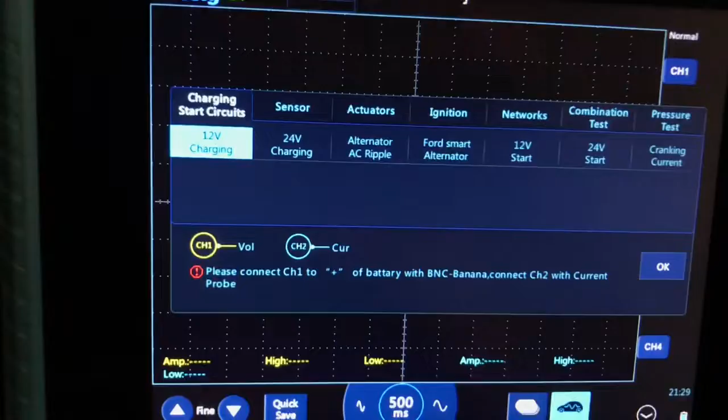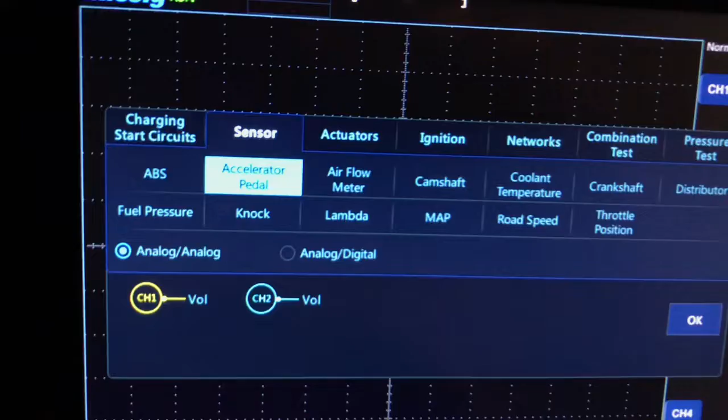Alright, we're going to go down here. If you have the ATO1104 with automotive presets, you're going to go down here and press automotive presets. Then we're going to go to sensors, we're going to go to accelerator pedal. Man, it's just not wanting to. Okay, we're going to go to accelerator pedal.

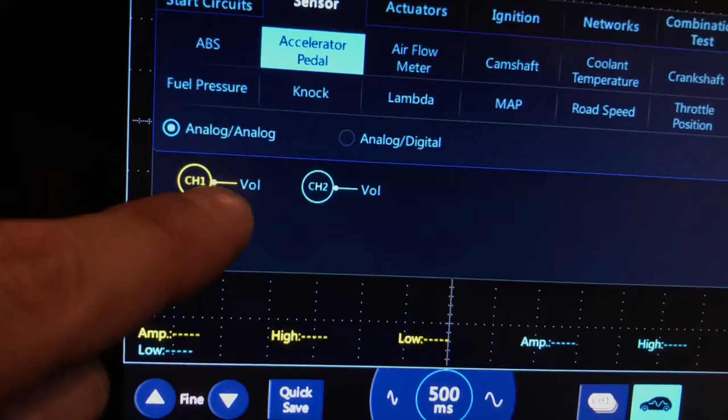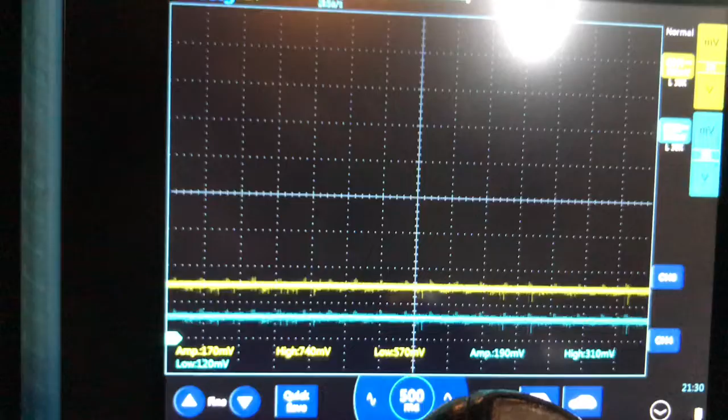And as you can see down here, it tells us channel 1 voltage and channel 2 voltage. So we're going to hit OK. And it's going to bring up our traces. Channel 1, sensor 1 is the yellow trace. Channel 2, sensor 2 is the blue trace.

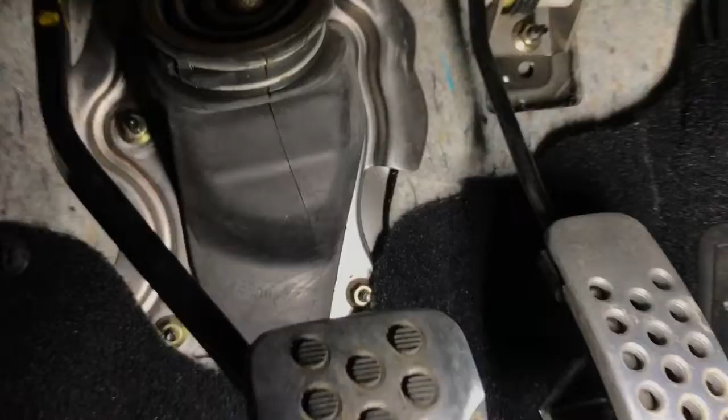Oh, let me take you underneath here. Sorry about bouncing around, let me show you where we're connected the best I can. Alright, here's our pedals, clutch, brake, and gas to the right. I'm just going to follow up your gas pedal. I'm trying to do this like upside down where you can see.

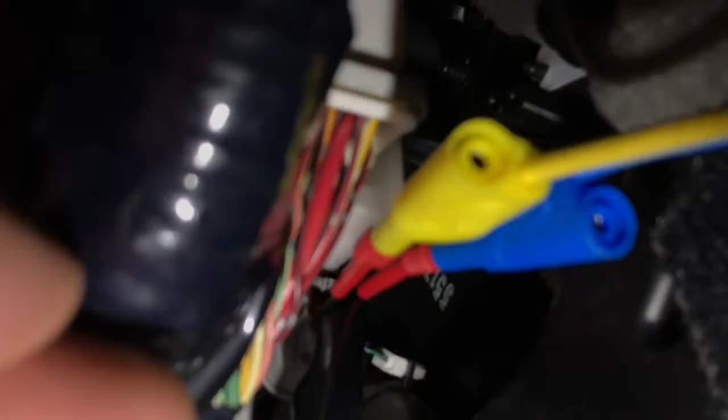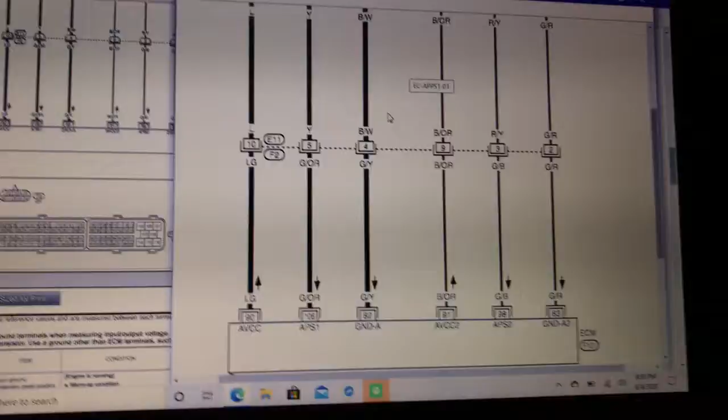Here we go. You can see right here is... man, it's really not good, I'm gonna take my word for it. The harness is right there. Okay, and channel 1, let me show you over here. I'm gonna need to edit this, huh? Why does that look like that? Looks all shaky and stuff.

So here we go, accelerator pedal position, sensor 1 and sensor 2, they're actually in the same harness. So don't get confused looking for a second harness that's not there.

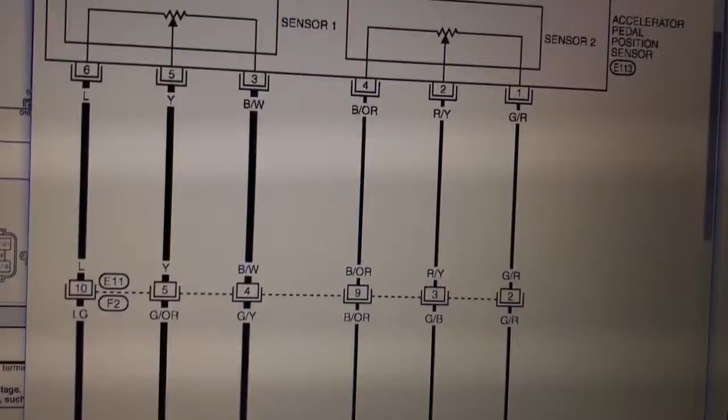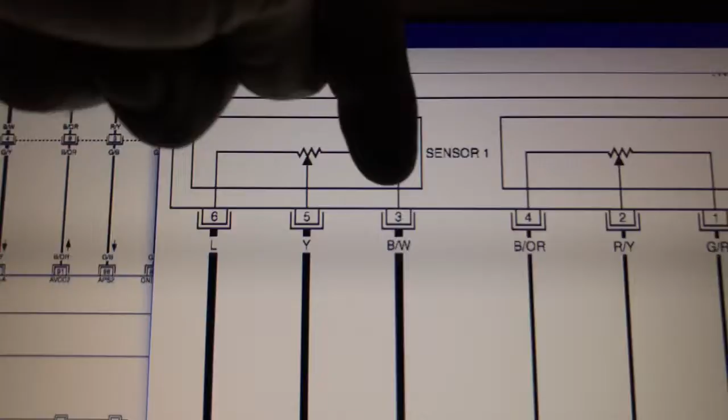So we're connected. We want to be on APS1 and APS2. If you follow that up, we want to be on the red and yellow wire, and for sensor 2 and for sensor 1 we want to be on the yellow wire. Okay, so that's our voltage end.

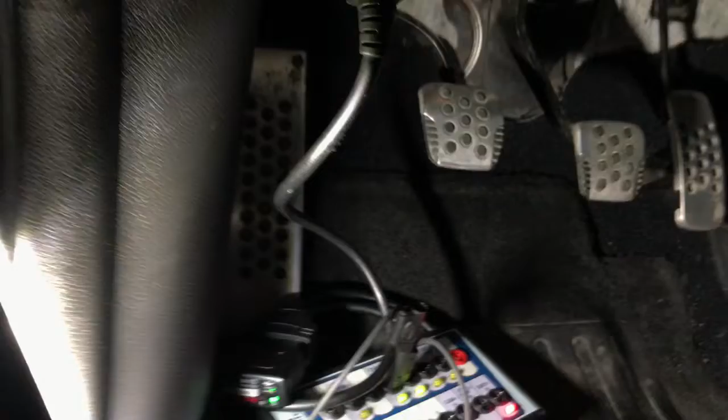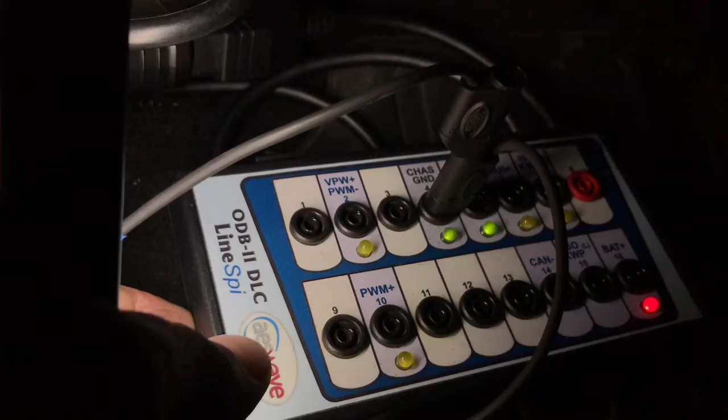For our ground, since I prefer using the battery ground, and AllData will tell you do not use the ECM ground while doing this, since I couldn't reach all the way to the battery ground and I didn't want to bring out my Power Probe 4 to give me a ground, which you can do, I'm using a Bob breakout box. This one here is an AES Wave, this is the AES Wave LineSpi.

Notice channel 4 says chassis ground, and then channel 5 is signal ground. So I'm just piggybacked, as you can see, on channel 4. You can see the green light is lit up. If you're not familiar with this, you can see green lights lit up for both of the grounds right here.

Man, it's a terrible recording, I apologize guys in advance. Two grounds, and then right here on pin 16 is your battery. Yes, this red plug or banana plug should be right there, and the black one should be up there, but in my world everything seems to be upside down.

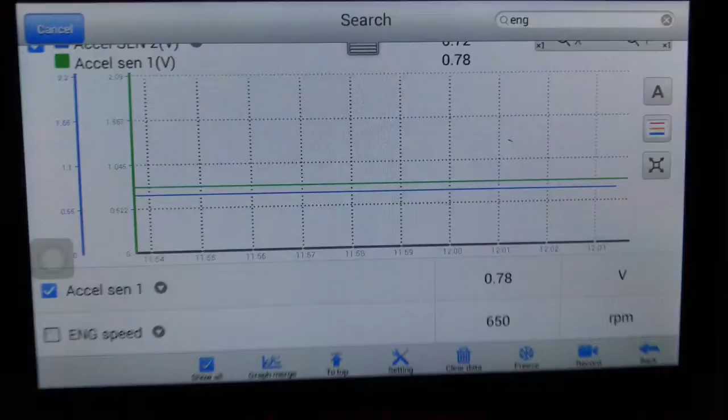So there we go. Also plugged in to the bob is my Autel. I got it plugged in. So we have our grounds here, we have our power leads there, we have our scope right here, we have our Autel, and let's see if I can get that.

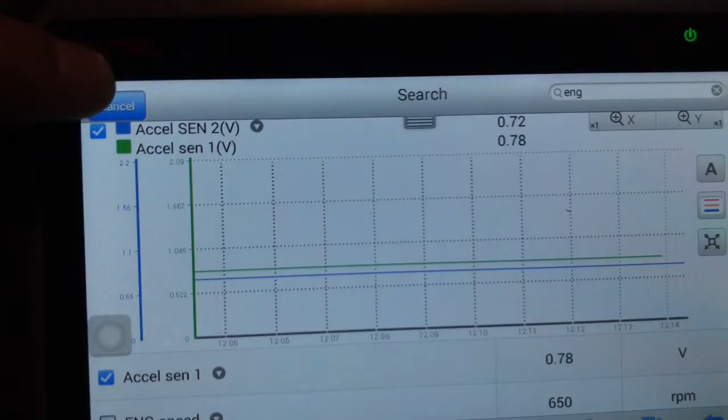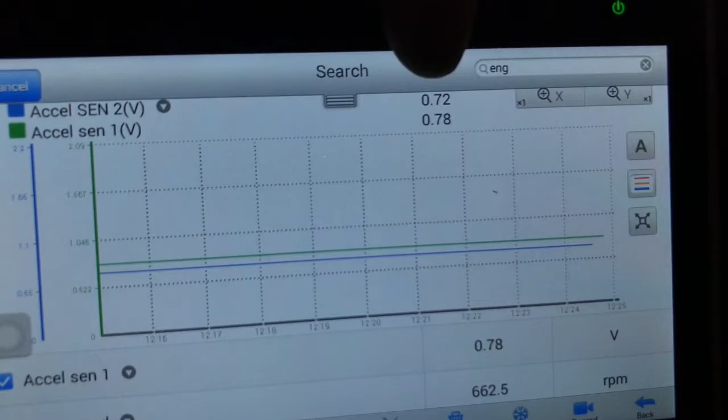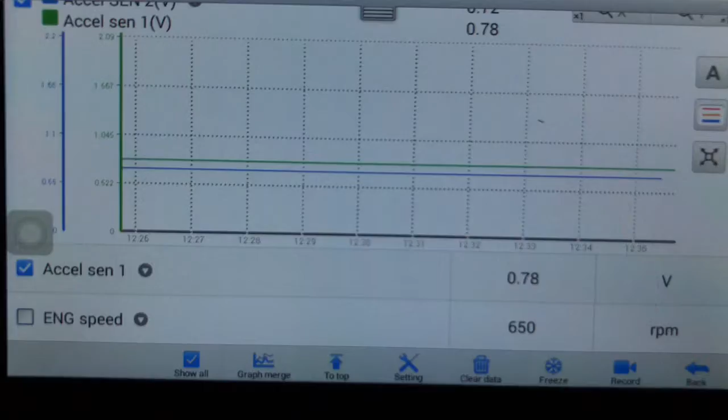I already have pulled up accelerator, says sensor 1 and sensor 2. Okay, you see the voltage on sensor 1 is 0.78, sensor 2 is 0.72 volts. I also have the engine speed pulled up just for my own sake. We're about 650 RPMs.

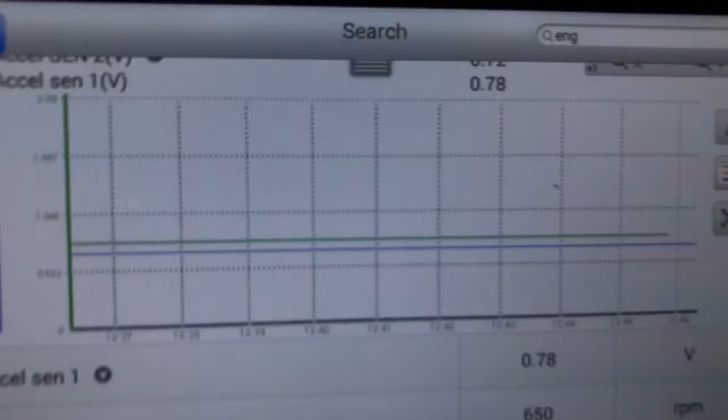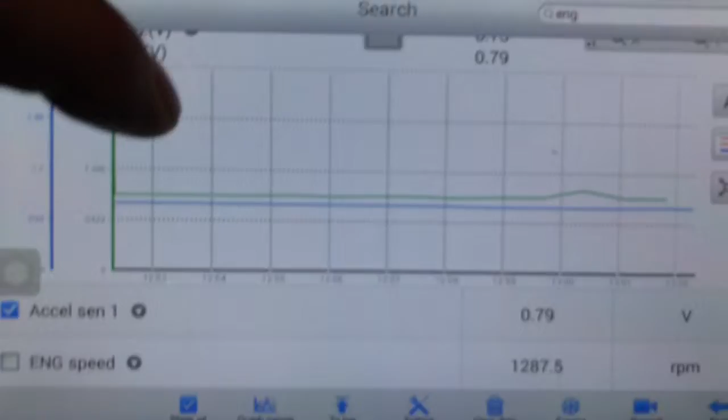Alright, so with that said, when you're looking at these, you want to look for dropouts. Okay, people think that when you give it gas, if those aren't lined up perfectly, then there's a problem. That is not the case. In fact, sometimes, like here we have a blue trace and green trace, on some vehicles, the blue trace may be going up like that, and the green trace may be inverted, and that is perfectly normal.

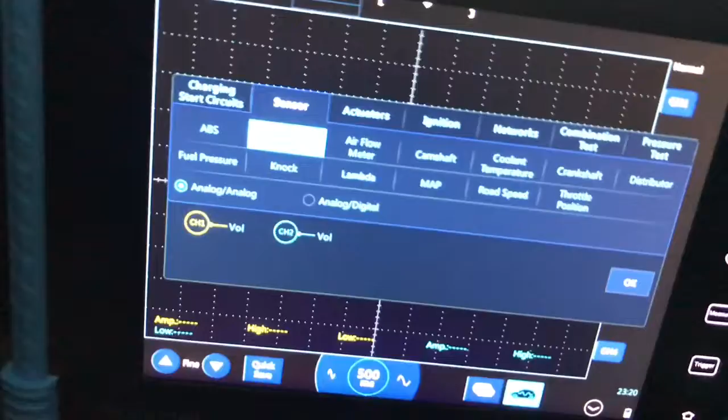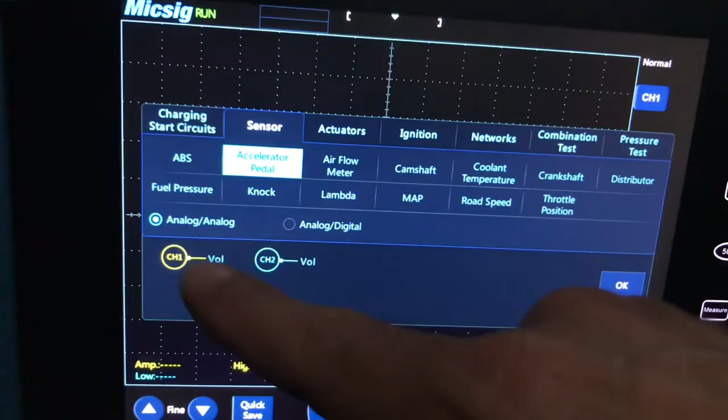Alright, so now everything is set up. We'll go ahead and go into our automotive scope. We'll go down here to our automotive presets, already there on accelerator pedal, you can see that. Channel 1, channel 2 for voltage. Okay, alright, now it has us set up for channel 1.

It's just really not. There we go. Alright. Oh, man.

Channel 1 and channel 2 is set at 500 millivolts per division, and our time base is set at 500 milliseconds per division.

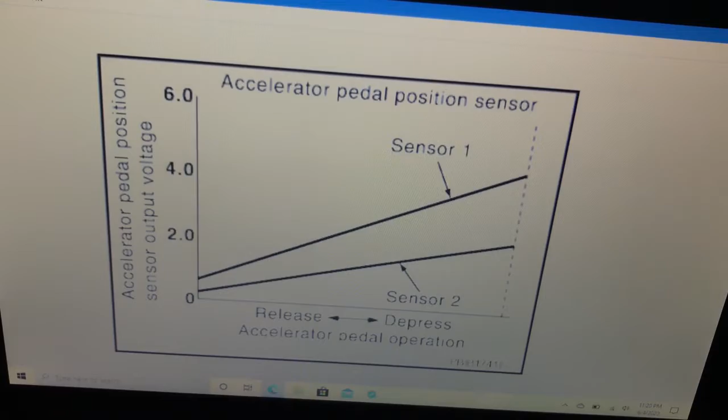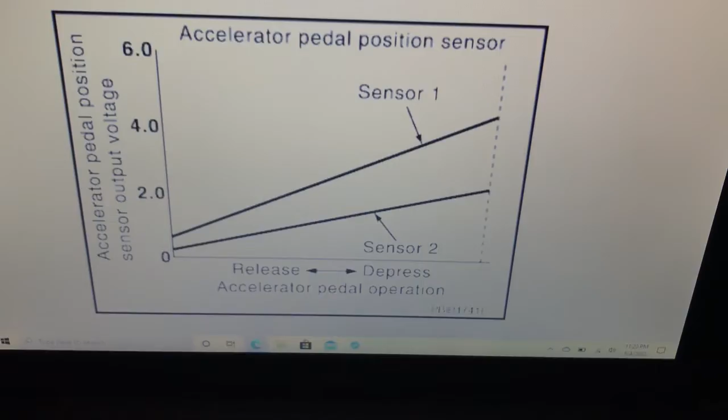Okay, what we're looking for here, as you can see, the top line, sensor 1, we want to get up just over 4 volts, and sensor 2, we want to get up just about 2 volts. That's with the pedal fully depressed.

Alright, so here we go. I'll fully depress the pedal. Okay, we're a little off the screen. I might be able to just lower down channel 1 instead of changing the time base. Let's see, I'll put it down right there. Let's try that again.

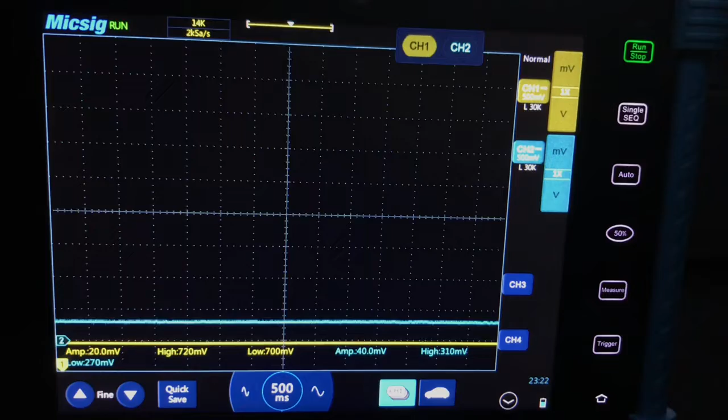There we go, that's a little better. Alright, first we'll do a gradual little sweep all the way. Look at that. And that looks just like - I'll do that again, watch.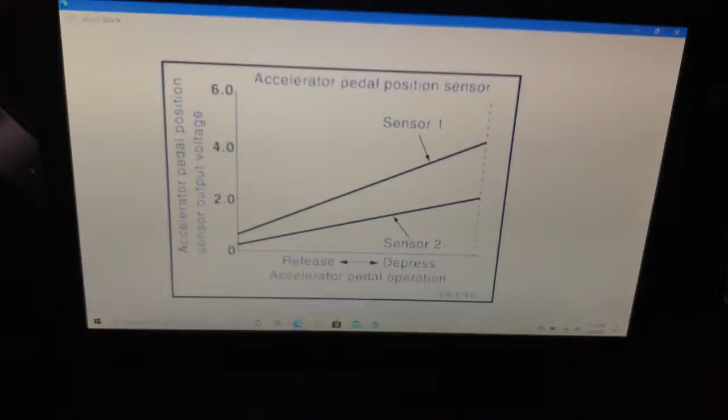Pause it. Look, see how that rises up? With sensor 1 on top, sensor 2 on the bottom, just like in the picture.

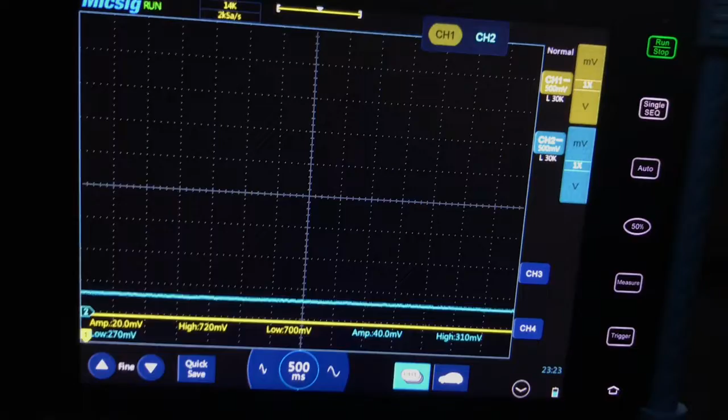Alright, we'll play it, and now we'll just depress it all the way with the throttle snap. And channel 1, we should be up to just about 4 volts, a little over, and just a tiny bit over on 2 volts on channel 2.

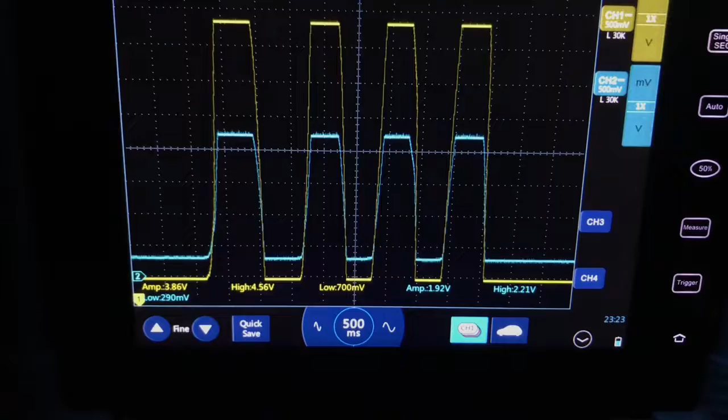We'll do it a few times. It's all consistent, there's no dropouts. What we're looking for here is maybe something to just kind of drop down or spike up too high. We're not seeing that, we're seeing all consistent traces.

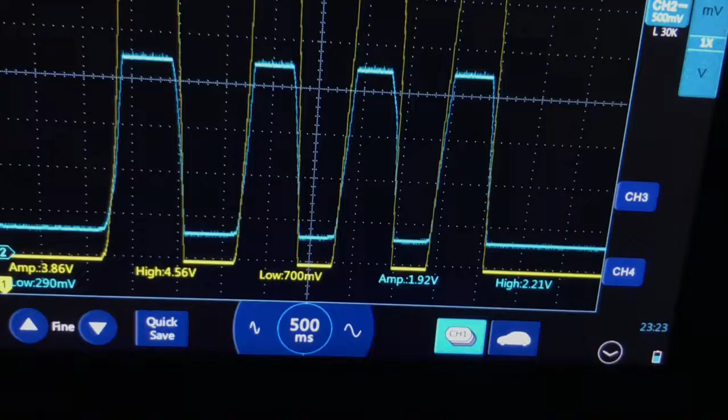And we'll look at our measurements on the bottom. Channel 1, we maxed out at 4.56 volts, so that's good. Channel 2, we maxed out at 2.21 volts. So perfecto, my friends, looks good.

We'll go ahead and let's go ahead and take a screenshot capture of that. Turn the video on just for a moment, and let's see, we're on channel 1. We'll do a quick save for channel 1.

We'll go to channel 2, we'll also do a quick save. That should save us both of them. Matter of fact, we can find out. Man, my camera, I'm sitting it on this thing, and it's trying to find a good spot for you guys. Here we go.

Maybe. Of course not. Alright, I give, Uncle.

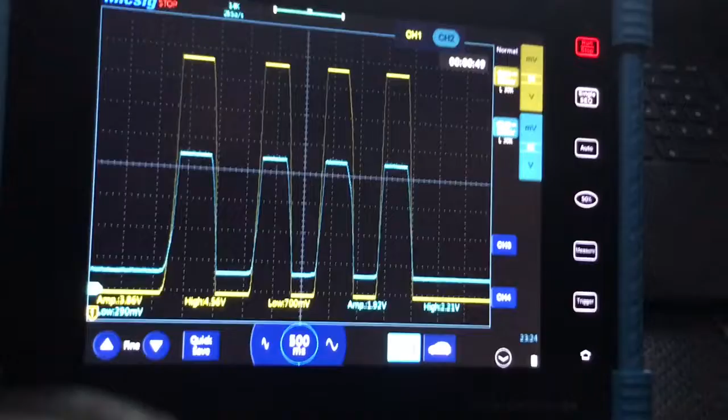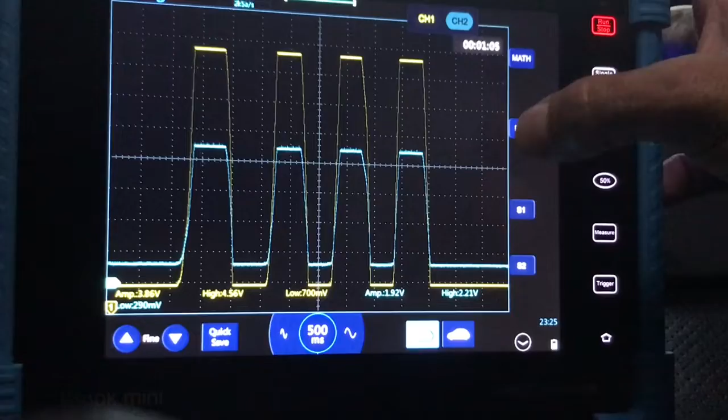Alright, there we go. So we can go down here, pull up our reference waveforms. Maybe. Oh, we can't do that during play? Oh, wait, there we go. No, I guess we can't. I didn't know that, can't pull that up. Is it because I'm recording a video? No, we just can't. Why is that not coming up? It's not right.

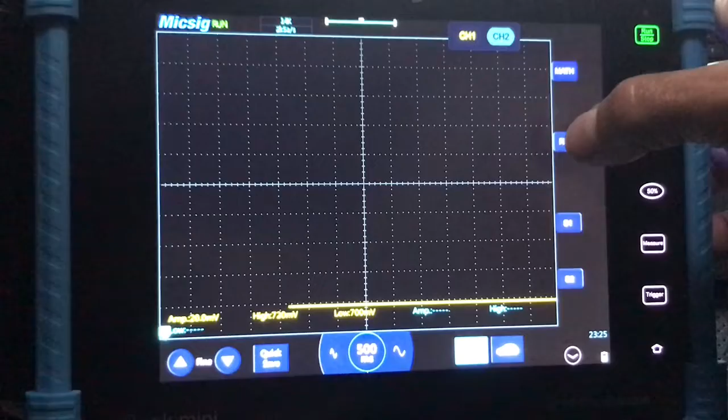Channel comes on. I hear it clicking. That's weird. Anyway, so

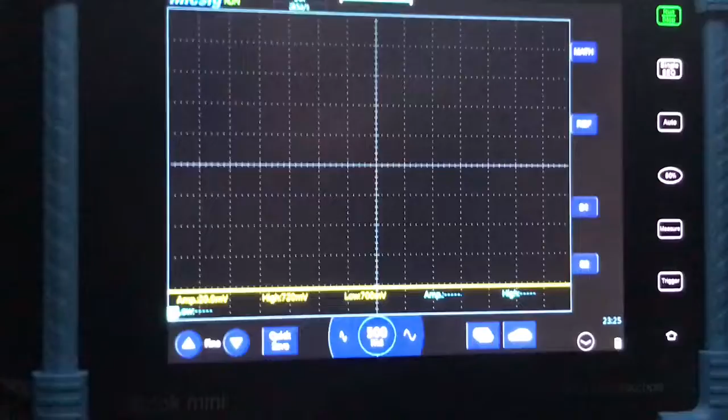We can't pull that up. We'll do a quick save on channel 2 real quick. Open to channel 2.

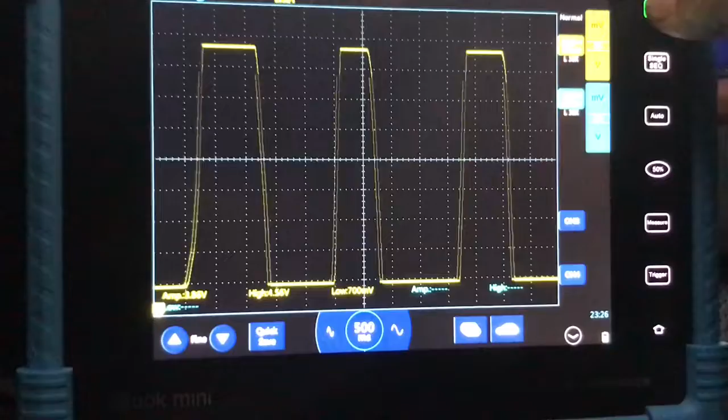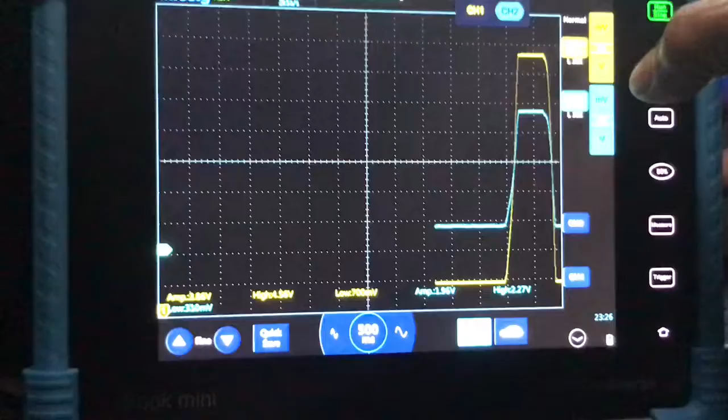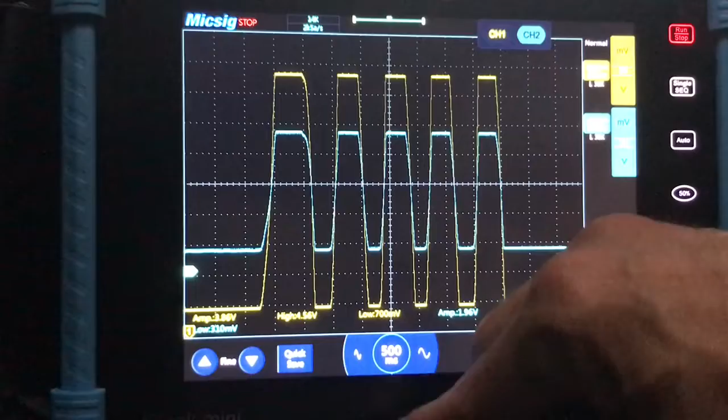Yeah, what's up? What are you up to? There we go. Channel 2, alright, so 1, 2, 3, 4, 5 consistent ones. Pause, just make sure we're on channel 2. We got a quick save. There we go. This bread? Yeah. Yeah, it's not expired? I don't think it is, but some of it is.

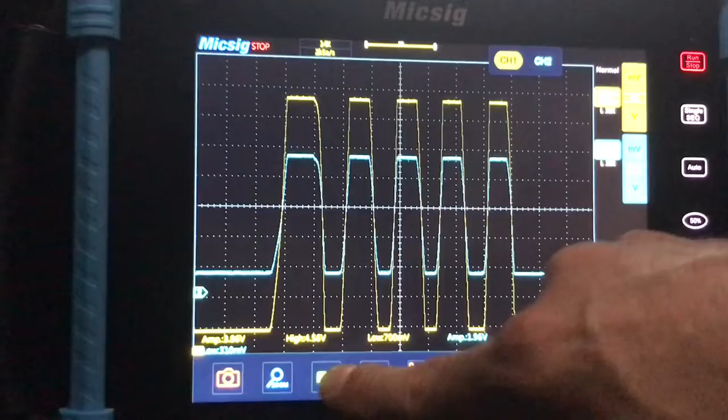Quick save, channel 1, quick save, just make sure we have both. Alright, so, and real quick before I turn this off, let's see here, give me just 1 second, Rudy, I'm just about done here.

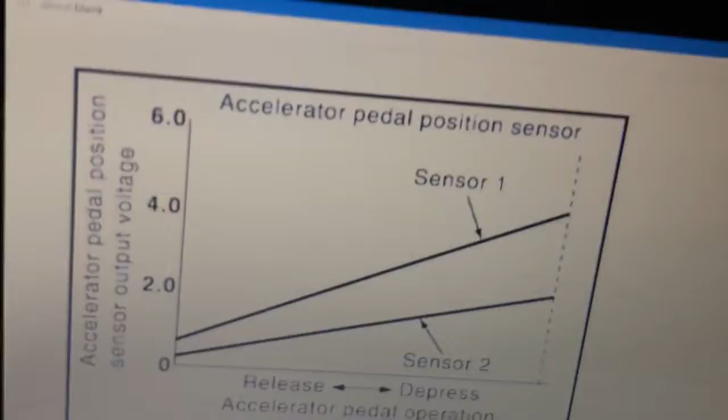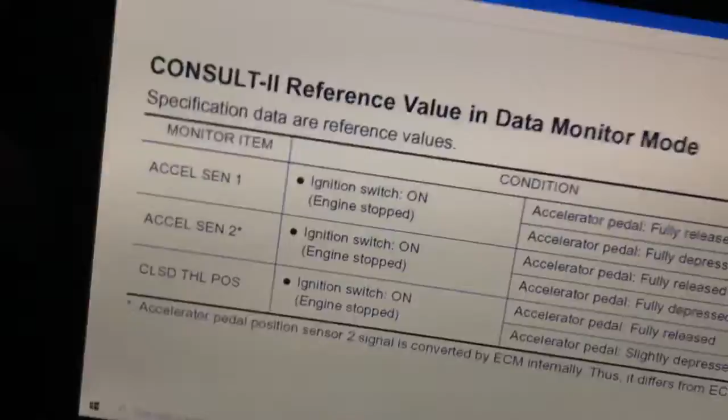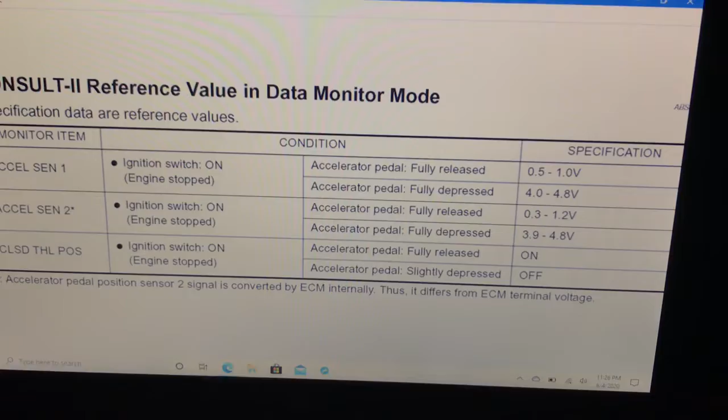Alright, so that's at the scope, and now if you want to know what your values should be on your scan tool, you can see right here, that is where on number 1, sensor 1, we want to be, when we're fully depressed, 4 to 4.8 volts, and channel 2, or sensor 2, also on my scope, channel 2, we want to be 3.9 to 4.8 volts.

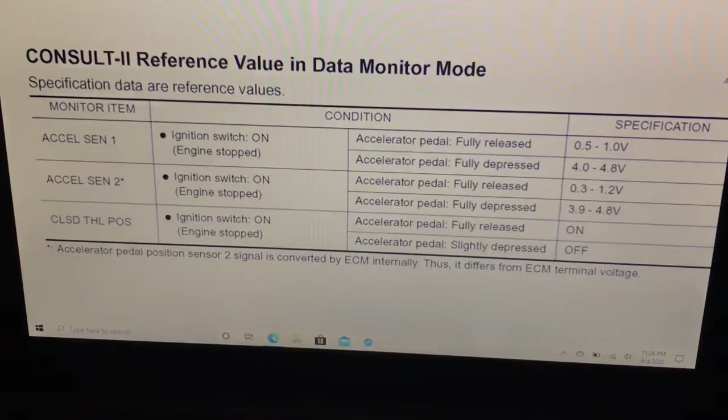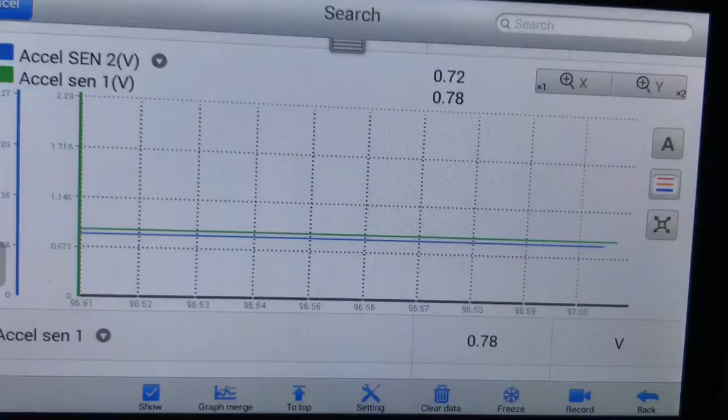So here we are on the Autel. There we go, on the Autel. That's sensor 1, sensor 2, and I'm gonna do slow sweep just like we did with the scope. And I'm off the scale.

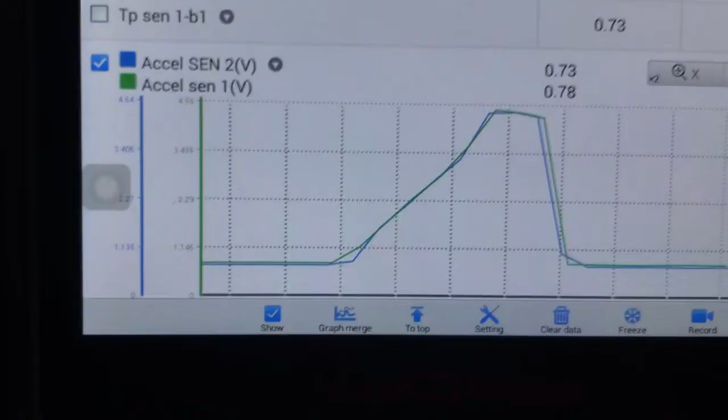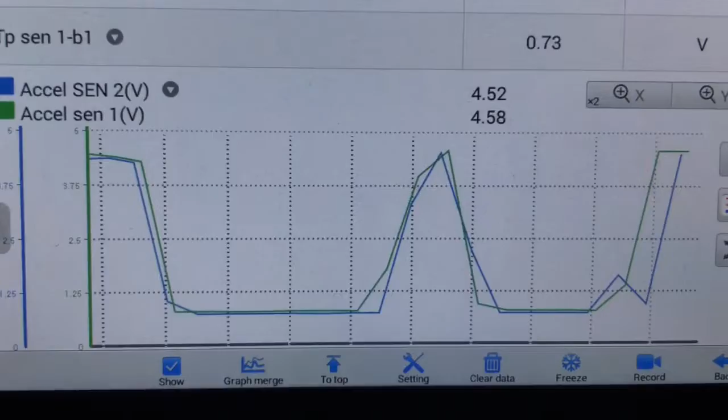There we go, okay, slow sweep. This is why I'm here. Okay, I'm going to go full throttle snap. We're at 4.52 on sensor 2 and 4.58 on sensor 1.

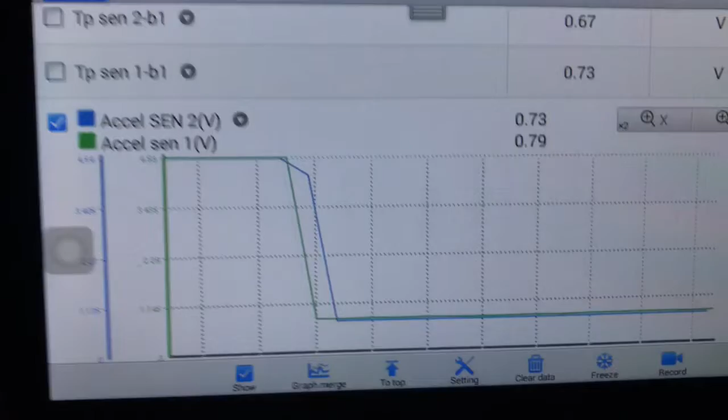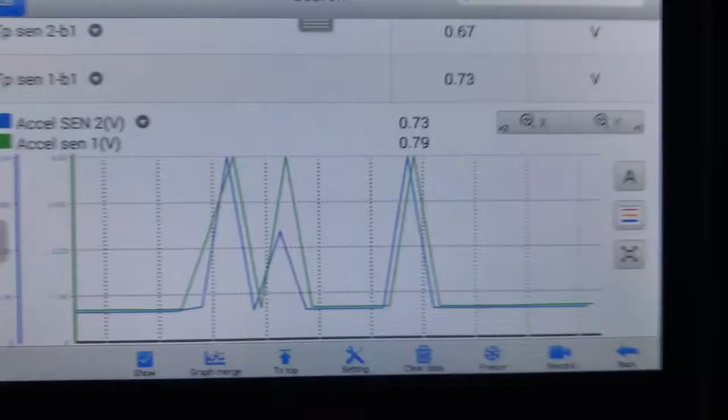So we are right in there between 4 and 4.8 volts on both of them. I want to point out, a lot of people think you can see a dropout on your scan tool. This is not always the case. A lot of scan tools, even good ones, the data does not process fast enough to pick it up. I don't have any problems on this vehicle right now with this sensor, but I've seen it elsewhere.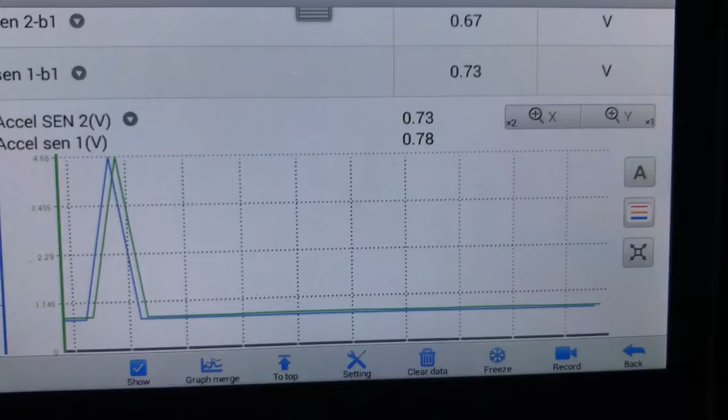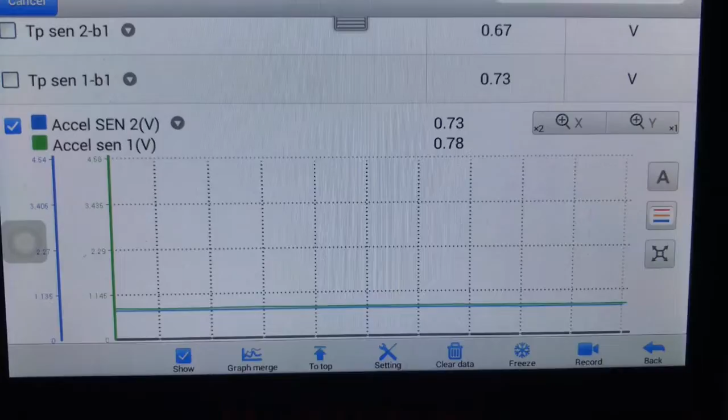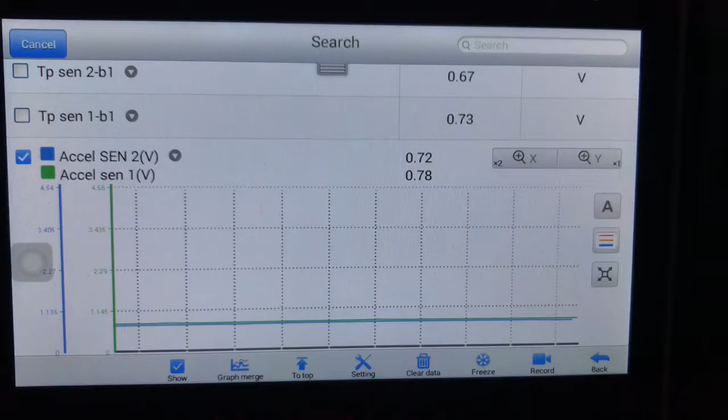Like Scanner Danner has a few good videos of it. If y'all haven't seen him, go check him out, man. I've learned so much from him. He's an instructor at Rosedale Institute, I think in Pennsylvania or something. He also diagnoses vehicles for shops when they can't do it. He has a lot of great info. Just go check him out, Scanner Danner, you'll find him, his name's Paul Danner. He's really got it together.

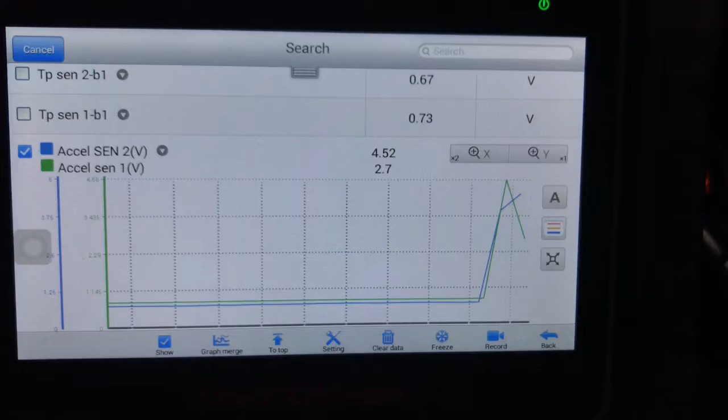I've learned so much from him, and I've seen videos where on the scan tool you're pressing like this and everything looks fine, you don't see any problem, but when you turn to the scope, the same exact pattern may drop down, drop out, and the scope is fast enough to pick it up whereas the scan tool is not. So don't rely on your scan tool 100%.

Alright guys, I think that pretty much covers everything. Accelerator pedal position sensors 1 and 2 on the scope, on the Micsig, and that's it, looking at them on the scan tool, on the scanner.

I'm not sure what I did with my flashlight, but like I said, we're doing our grounds off of the breakout box.

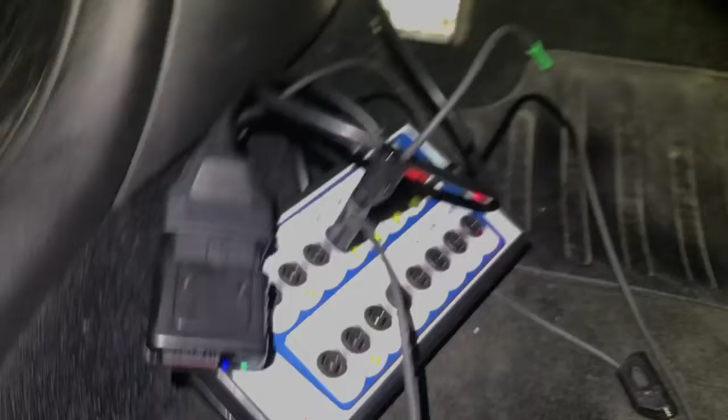This one's AES Wave's LineSpi. I'm plugged in with my scan tool to it. If y'all don't have one of these, get one. I know this particular one sells for 200 bucks on AES Wave. I was just about to buy it myself when, luckily...

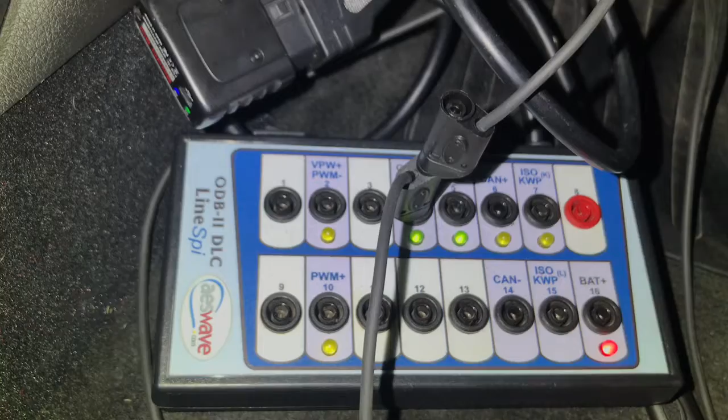I just out of the blue decided to look up Craigslist, and I found this one for 35 bucks. I sent pictures to AES Wave because I noticed that red banana plug should not be on number 8 but on number 16, and the black one should be on number 8. So I opened it up, took pictures of the circuit board and the whole thing, sent them to AES Wave, and they say it's definitely theirs. The only thing they saw was that some of the solders inside looked a little rough to be theirs.

So I don't know, maybe whoever owned this for whatever reason had to open it up and repair it. But it works great, everything works. This isn't a video about that so I'm not going to go too much into it. That's where I was pulling my grounds from, because I could not reach the battery ground.

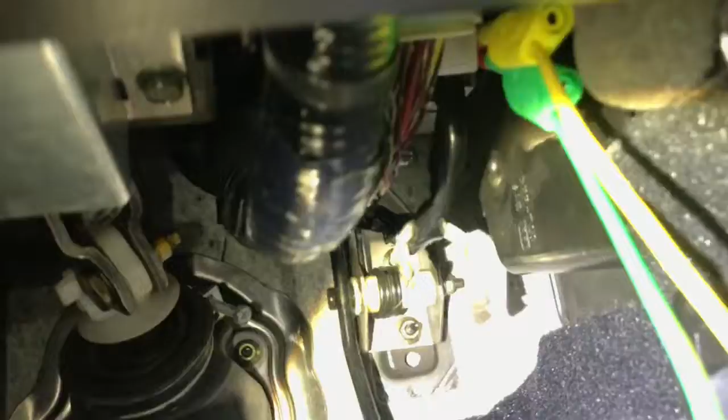And as we saw up here, this is where we're back probing at the sensor.

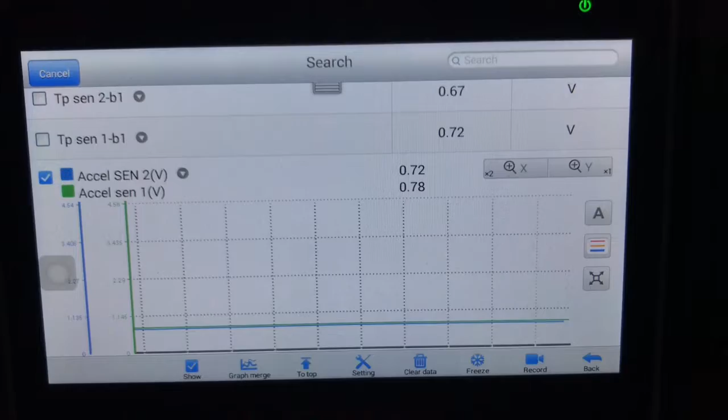I just had to throw this in here. Yes, you can pull up your reference waveforms while you are in the middle of doing whatever it is you're doing. I'm not sure why it didn't let me do it a second ago, but I restarted it and now it's letting me do it.

As you can see, I'm pumping the gas pedal in the background. Anyway, just wanted to throw that in there. I'm not sure why it wasn't letting me a moment ago, but they're all there, all the ones that I took. I actually took a lot of them. I always take a bunch, and then whichever ones I don't want to keep afterwards, I delete them.